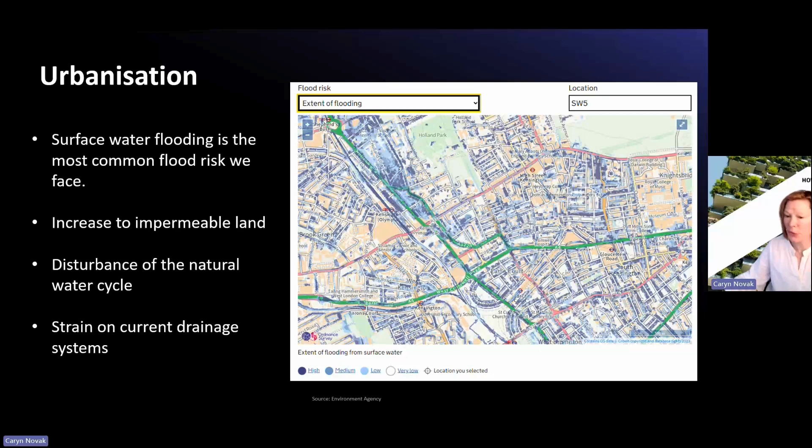So we need to rethink water. It's a valuable resource. For too long, we've tried to get it away from buildings as quickly as possible through piped drainage networks. So normally, if it rains heavily during a storm, water will sink into the ground. But in areas where you have roads, tarmac driveways, large paved areas, it runs down the street and into gutters.

With traditional drainage, we treat water as a problem or waste product, and we try to make it disappear using drains and pipes to take it to the nearest watercourse where it's discharged. During heavy rain, not only do we overload these pipe networks, which can result in situations like the manhole overflowing, this presents not only a risk to property, but also to human health, since this water can be mixed with sewage in combined systems like they have in most cities.

There also can be an impact at the other end on the river and stream where you get a surge condition created, and that leads to localized flooding there as well.

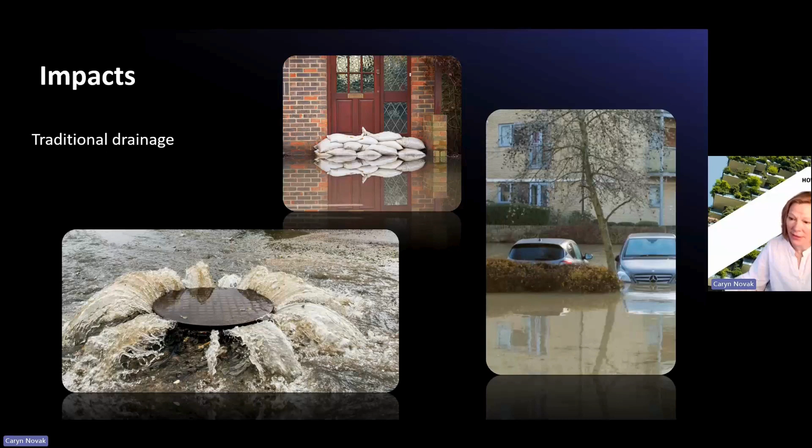So when we mention SuDS, and I'm sure you've heard about them, what are we talking about? SuDS is Sustainable Urban Drainage Systems, and they're a way to reduce surface water flooding. It's about creating space for the water to sink back into the ground near to where it would fall naturally. So it's about treating the problem upstream rather than having to deal with it downstream. It's all about runoff reduction, slowing the flow, and water quality improvements, as well as amenity and biodiversity enhancements.

Water quantity, taking stormwater out of the drainage network and putting it back in the ground. Water quality, using natural filtration to take pollutants out of the water instead of creating urban runoff. Biodiversity, that's creating green spaces for nature. SUDS can also help fulfill some of the requirements for biodiversity net gain on a site if it's designed properly. And finally, amenity. It looks nice and it makes for better neighborhoods.

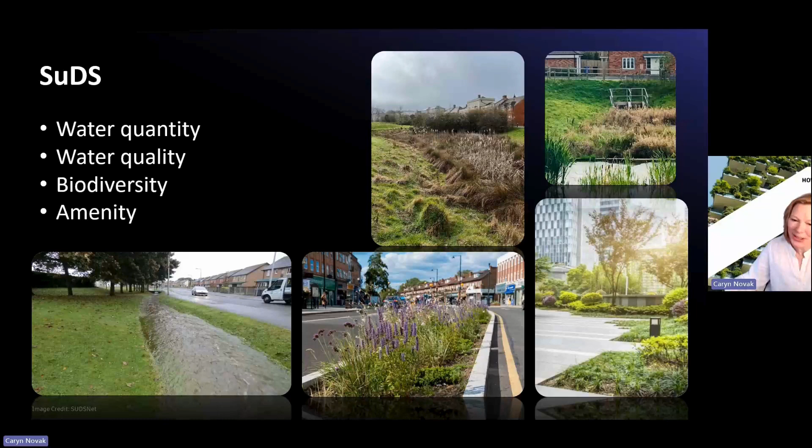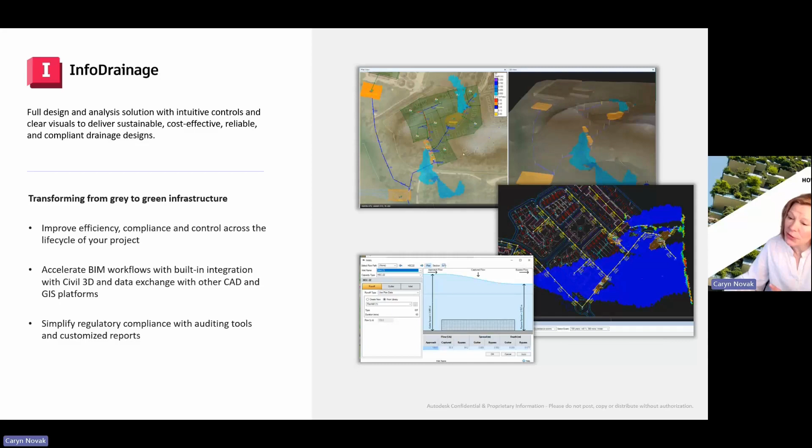So our product for drainage design is InfoDrainage. This is the upgrade from MicroDrainage. InfoDrainage has more functionality, and it's integrated with Civil 3D so that changes in one are reflected in the other, and it shares the same parts mapping. So we've been investing in R&D and working on this product to improve its accuracy. And that's because SUDS design isn't always easy to model, particularly when you combine SUDS features together to create a system and then use them in combination with pipe drainage.

And with the basic swale, you've got multiple interactions going on. You have the water flowing down the slope in the trench. You have water infiltrating the ground. You have water horizontally flowing through the gravel below, and also vertically into the gravel layer. And you also have the pipe with perforations at the bottom.

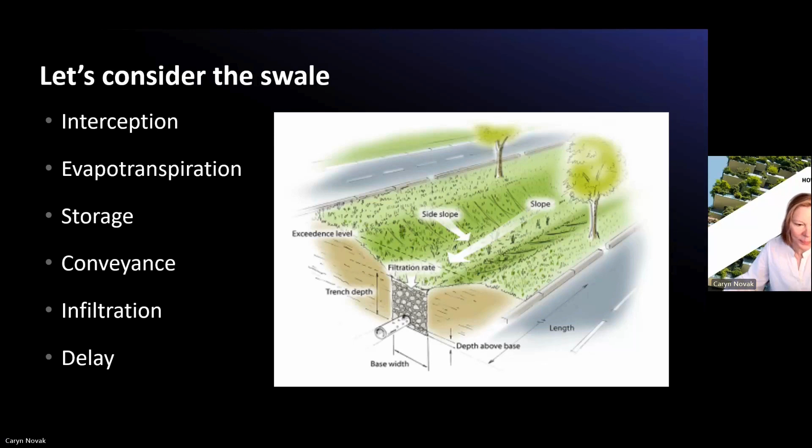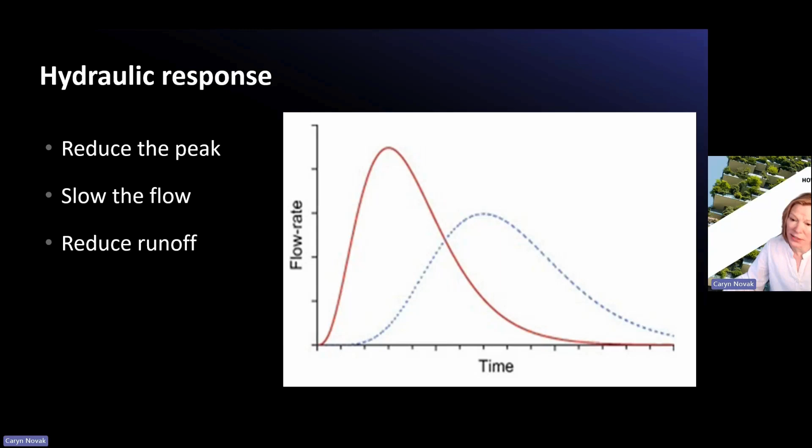So if you're using an oversimplification, quite often the gray solutions will win out over the green ones in a model. But with InfoDrainage, which was built specifically for SUDS design from the outset and not as an afterthought, you can replicate how it actually behaves and see what benefits your SUDS features will actually deliver. And here's an example of what you can model when you put some of the features together.

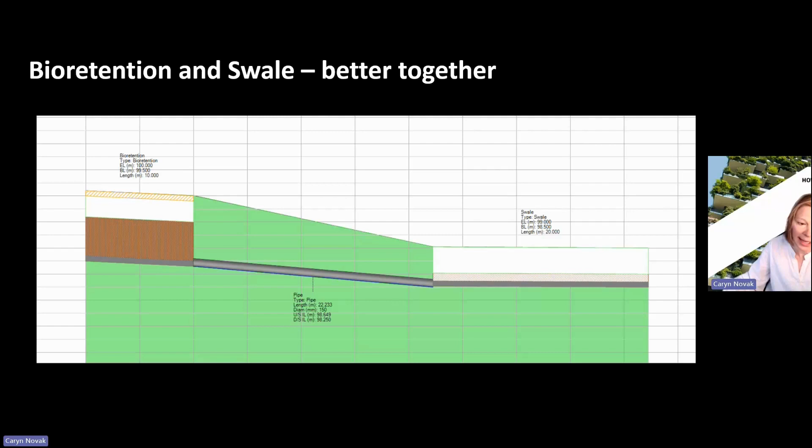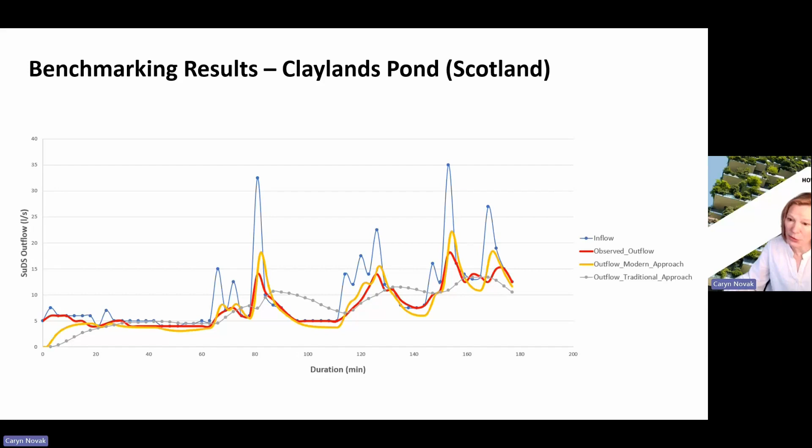Okay, I'd like to talk a little bit about a customer application where InfoDrainage was used. And this project is interesting because it used a new AI-based tool called the Machine Learning Deluge tool. And that allows engineers and designers to produce a flood map very quickly and accurately by simply applying water all over the site surface. So we trained InfoDrainage on many algorithms, over 10,000 traditional simulations.

It also allows you to try a variety of different iterations. So you can move things around in more real time, make changes, and get instant feedback on your flood map, and understand the impact of your SUDS features, and change the design to get improvements. So this is about optimizing in your design stage.

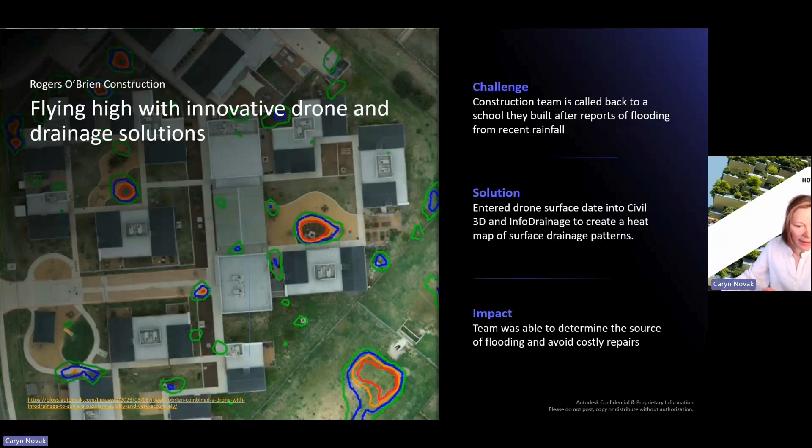So what's next? Well, I hope you have some ideas on how to prepare for Schedule 3 of the Flood and Water Management Act, and think about how SUDS in the design stage can help you with surface water management. Schedule 3 has yet to be implemented in England. Wales and Scotland have gone ahead. In the autumn statement, which was last week, the government indicated that it is minded to adopt Schedule 3, but they did not provide a time frame.

And also, the other thing that's coming is biodiversity net gain, which I mentioned earlier. We're not sure of the timing on that as well. That has also been pushed into 2024. But it will work in combination with SUDS if you landscape properly and create some spaces for nature.